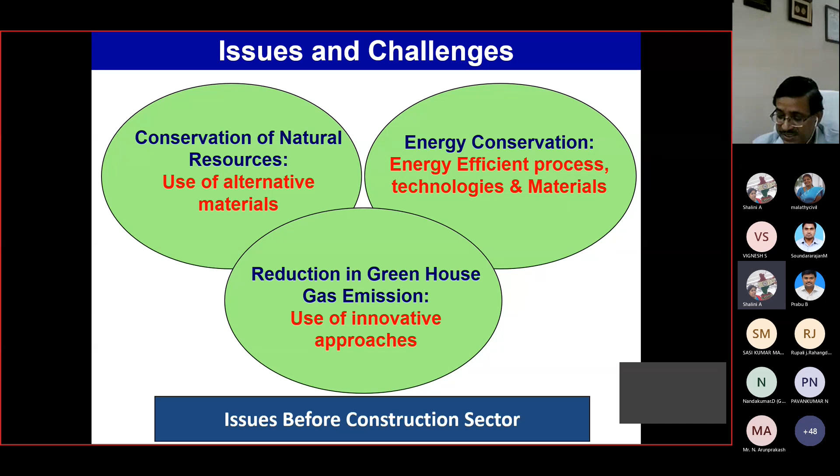Major energy is being consumed in the construction sector. If you look into energy and greenhouse gases, 35% of our energy consumption is in residential building, non-residential building and the construction industry. So it's not much in building, but the operational demand of residential buildings is very high, and we have to look for other renewable energy, and people are working on different aspects. So to get a net zero building, they are using solar power, wind power and other things, and doing green retrofitting, all those things to reduce the energy demand of our built houses and other things.

Similarly, if you look into emissions, they contribute about 38%, and building construction itself about 8 to 10%. So it's very high, and we have to reduce in those areas. So every organization and the government, Niti Aayog, climate change bodies, everybody is behind how we can reduce greenhouse gas emissions as well as global energy demand.

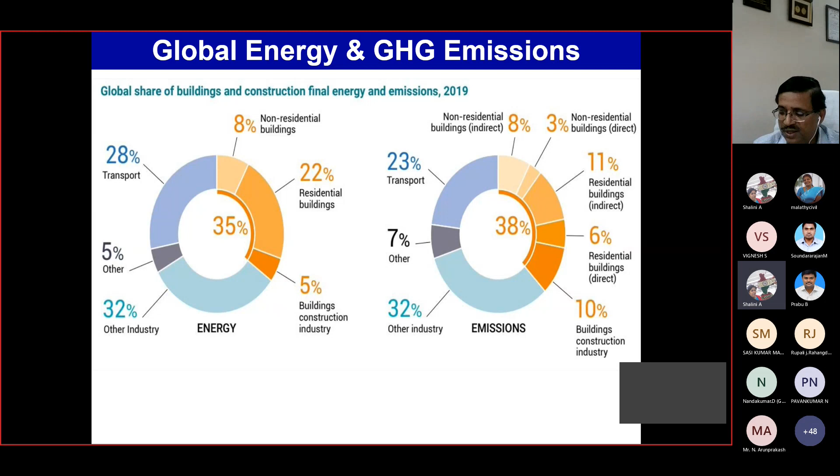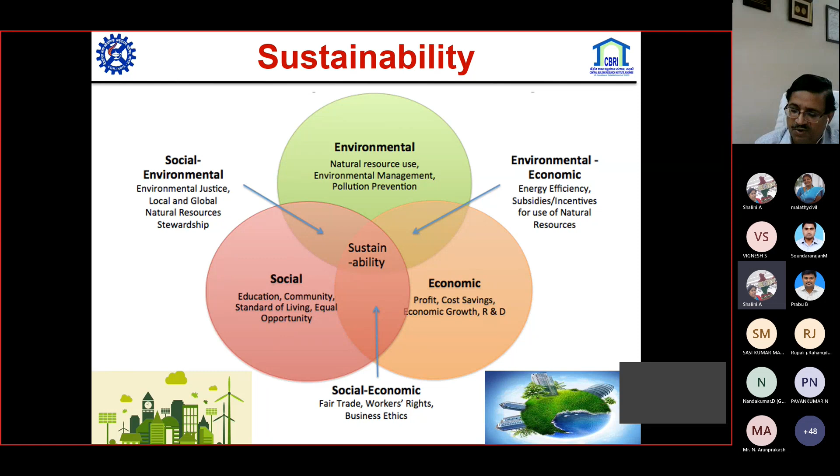And if you look into our infrastructure and the sustainable development goals, it is contributing to all 17. From goal 1 to 7, we are enhancing access to basic services, and from 11 to 15, really where our work should impact, that is promoting environmental sustainability, and 8 to 10 and 16, 17 support our inclusive growth.

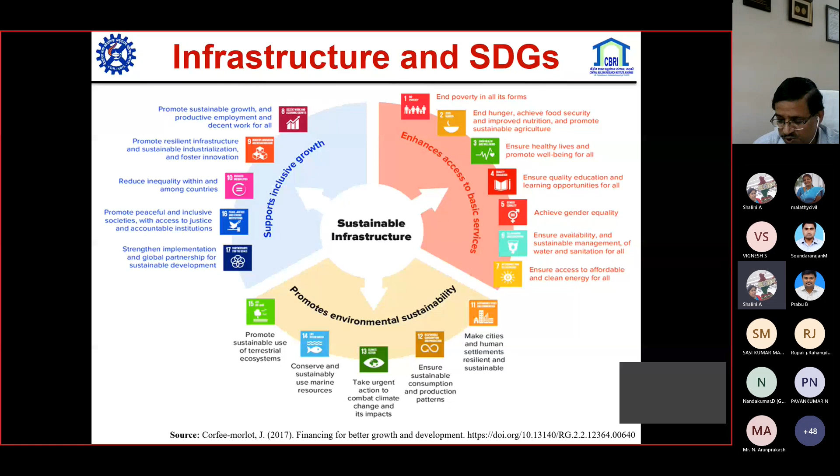But if you look very particularly towards building construction, we are meeting the requirements of good health and well-being, that is SDG goal number 3, affordable and clean energy, goal number 7, decent work and economic growth, 8, industry, innovation and infrastructure, 9, sustainable cities and communities, 11, responsible consumption and production, 12, climate action, 13, life on land, and that is important for our growth. So all our goals are here.

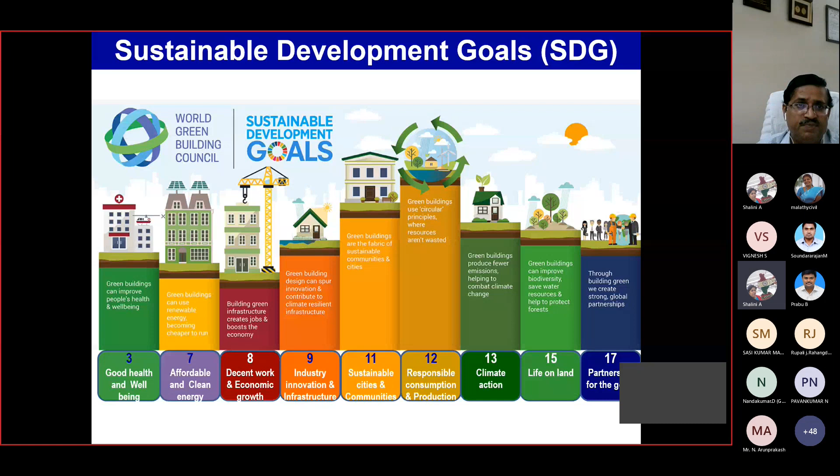To achieve all those things, if you look way back, some years back, we were taking materials. I worked in different parts; I worked as a project director in the National Highways Authority way back in 2000 to 2005. So what we did, we identified a source, some hillock, we blasted it and started getting good quality aggregates and put up our plant. So we were taking it, making our materials, using it, and throwing it. That was known as the linear approach. And until 10-15 years back, everybody was doing like this.

So if you are making a house, whatever materials we are not able to use are thrown away. That was a big problem, because it was the depletion of our natural resources. Right now we are not getting good quality sand, and everybody is looking for manufactured sand or alternative types of materials, or good quality coarse aggregate also, because our approach was towards the linear side.

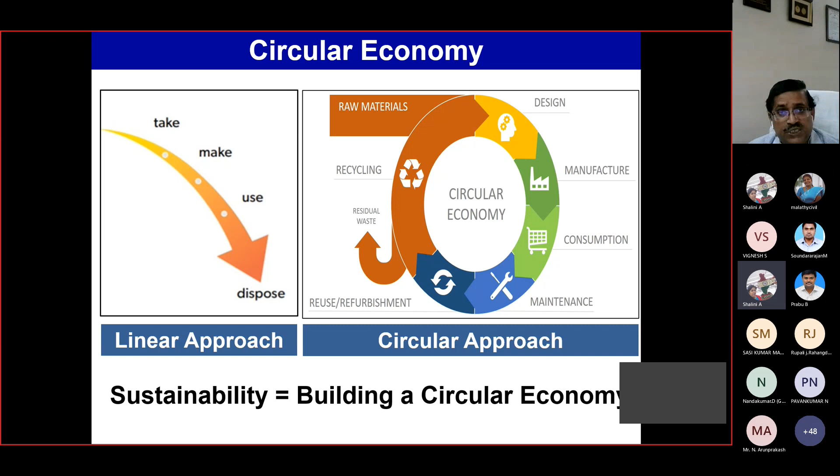And I have tried to show how, if there is some material that is not good raw material, or industrial waste, then by carbonation, or what we say carbon sequestration, we can enhance its mechanical properties and utilize it. So it can be steel slag or bio-ash or lime sludge, red mud, bottom ash, and we can utilize those materials as newer building materials and sustain that sustainability aspect. So that is the important thing.

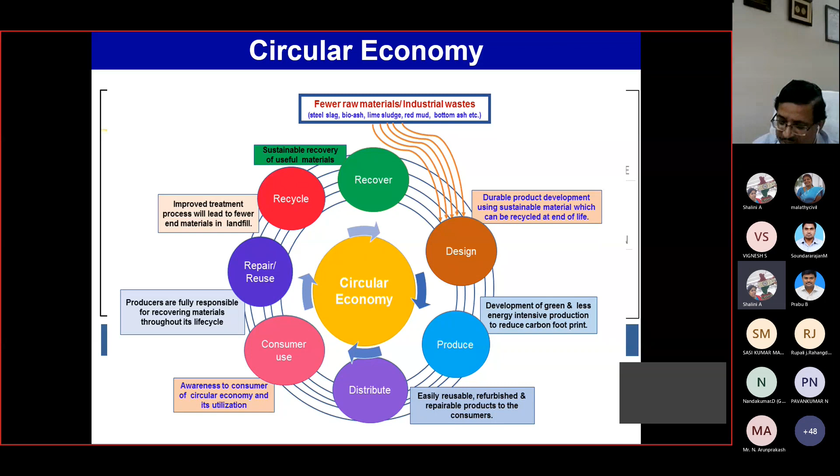So same thing, we have design, produce, distribute, use, recycle, and recover. Whatever waste is there will be thrown away, or we process it further, or we can utilize it for carbon sequestration. So this is, and I'm coming to my next slide, that is sustainable construction.

People always ask, what is sustainable construction? It is reduced resource consumption, reuse of resources, protection of nature, natural resources and material. That is the utmost important: recycling and reuse of construction and demolition waste, enhancement of service life of structures, reducing environmental impacts of cement production, greater use of supplementary cementitious material, research and use of emerging materials and technology, greater use of renewable energy, effective control and construction management systems, elimination of toxic material, applying life cycle cost analysis, and last but not the least, focusing on quality.

If you look into our buildings or infrastructures, if you have not focused on quality control during construction or at the initial stage of materials, a lot of problems occur and it could not sustain up to its life. So with that lesser life, we are using newer materials again, so that will be a big thing. So our main aim is to use emerging materials and technology in construction.

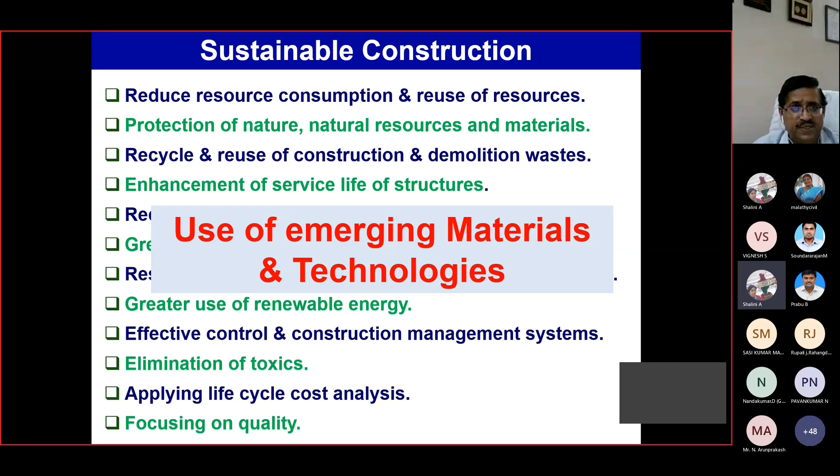So I have defined what sustainable materials are. Again, they are composed of renewable rather than non-renewable resources and should have environmental responsibility. Means they should have a minimum energy requirement during processing, minimum possible environmental cost, low energy utilization in manufacturing as well as functioning, and be easily recyclable, efficient, durable, with longevity.

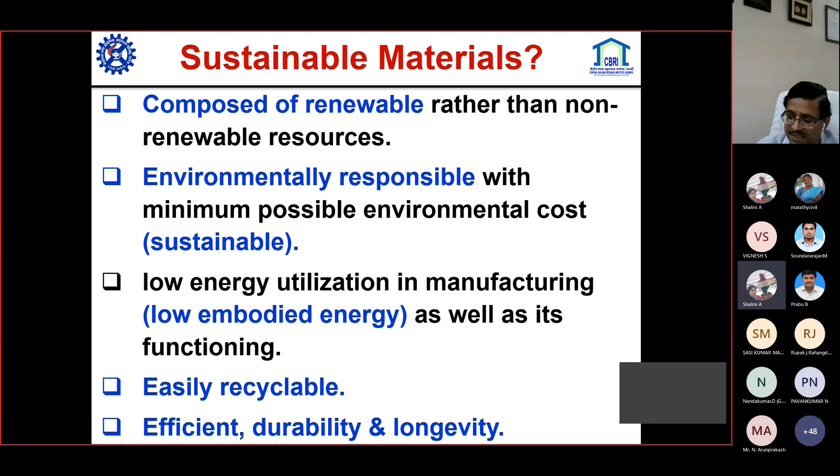As we are aware, ordinary Portland cement is one of the oldest materials. We have been using it for about 2 centuries, more than 200 years, and we are so accustomed to utilizing it that nobody can think of a material other than cement.

But definitely there are several other types of cementitious material available, and we are aware that about 1 ton of ordinary Portland cement clinker produces about 0.66 to 0.85 ton of carbon dioxide into the atmosphere. And this carbon dioxide is a major issue, and it comes from calcination of calcium carbonate or lime. So this is the process.

So people have started thinking how we can reduce this, because major CO2 emissions come from the calcining of limestone. So not only from the climate change committee or our Niti Aayog, cement manufacturing organizations are under tremendous pressure to reduce their CO2 emissions and also energy consumption during fabrication or production.

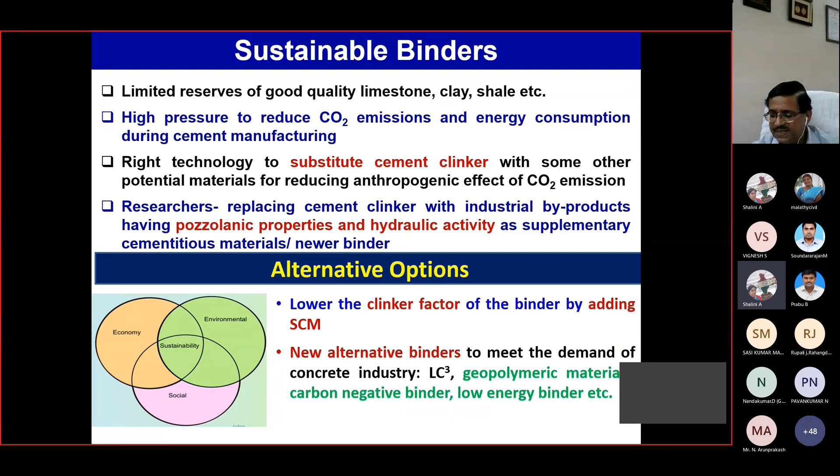And different types of low energy binders have been developed in due course of time, and people are working on that. A few binders have been tried, like calcium aluminate cement, where they added crushed limestone and bauxite, and that work is going on and they have found it's okay. They have found there is a strength loss by conversion of metastable hydrates, but overall there is no problem in functionality. Calcium sulfoaluminate cement is limestone, bauxite, and gypsum. This is a little bit expensive. It expands. Some people have reported on durability, but work is going on.

Composite cement, as I have told, has Portland clinker only up to 30 to 35%. The balance 60 to 70% is GGBS, that is ground granulated blast furnace slag, and fly ash. Its initial strength is lesser, and it requires extended curing durations. Another is composite limestone cement. Similarly, there is alkali activated binder, what I called geopolymer binder. We have worked at CBRI on two component based binders, but right now we are working on single part binders like cement, and we are improving rheology and setting time issues.

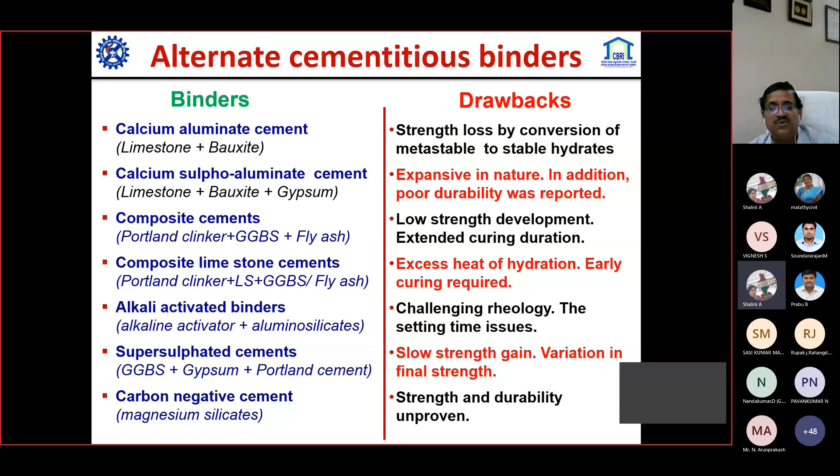Super sulfated cement, and carbon negative cement, which I have discussed, that is magnesium silicate. In due course of its use, it takes up a lot of carbon dioxide, gaining strength and durability. Still, fewer things are known. I have mentioned limestone calcined clay cement. I have told that we have not thought beyond our ordinary Portland cement, because we have been working with it for the last 2 centuries. We know each and every property of it.

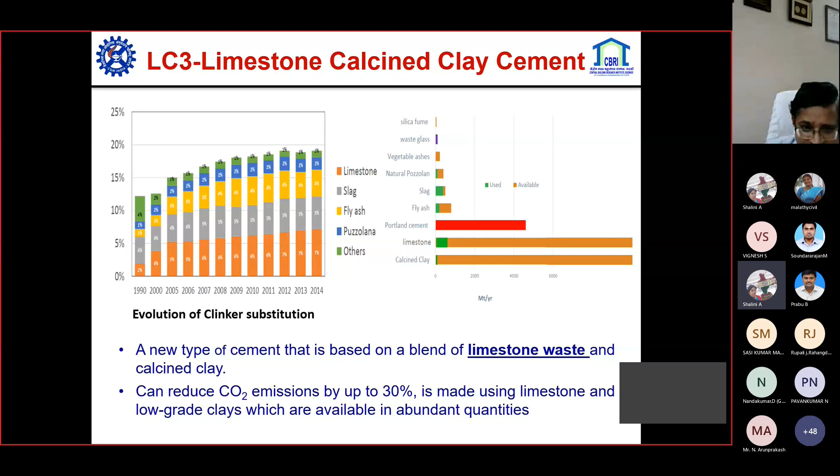But in this we have blended not good quality limestone, the second type of limestone waste, and calcined clay. Clay is calcined at a lesser temperature, about 600 to 800 degrees centigrade, and overall CO2 reduction is about 30%. In India we have abundant low grade clay and this limestone, so we can utilize them and produce a good quality material. A few manufacturers have come up making this, and one day you'll find people start using it, because there is so much pressure on reducing our energy demand as well as CO2 emissions.

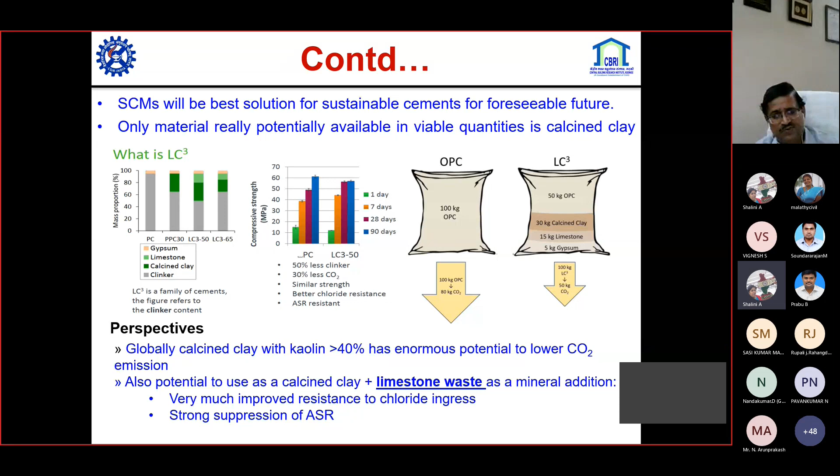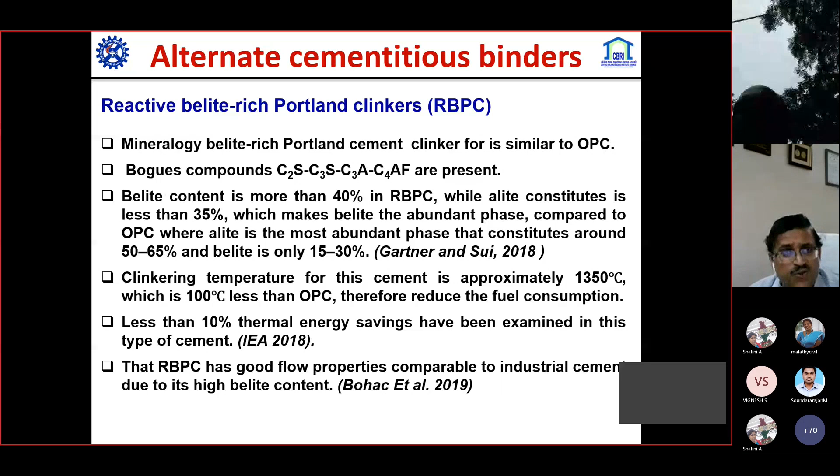Another is belite rich Portland clinker. It was invented in China, and several other countries have started looking into it. Mineralogically, it's similar to ordinary Portland cement but a little bit different, because the belite content is higher, and by this our energy demand is reduced: the clinkering temperature goes from a maximum of 1450 degrees centigrade to only 1300 to 1350 degrees centigrade, and overall energy saving is less than 10%. Its properties are good, and a lot of high belite cement is being used all over China, where a few manufacturers are producing and utilizing it.

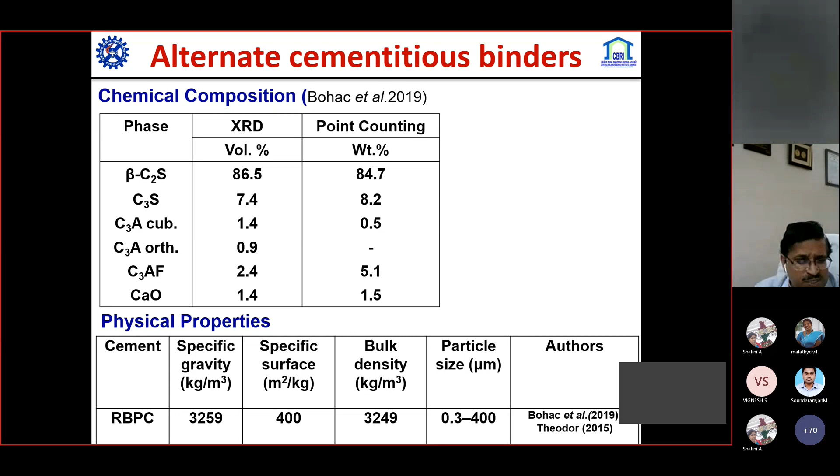If you look into this beta C2S, the belites have a high quantity as compared to other C3S or alpha C2S and other things. The specific gravity is about the same, little bit higher than this one, and other properties will be the same.

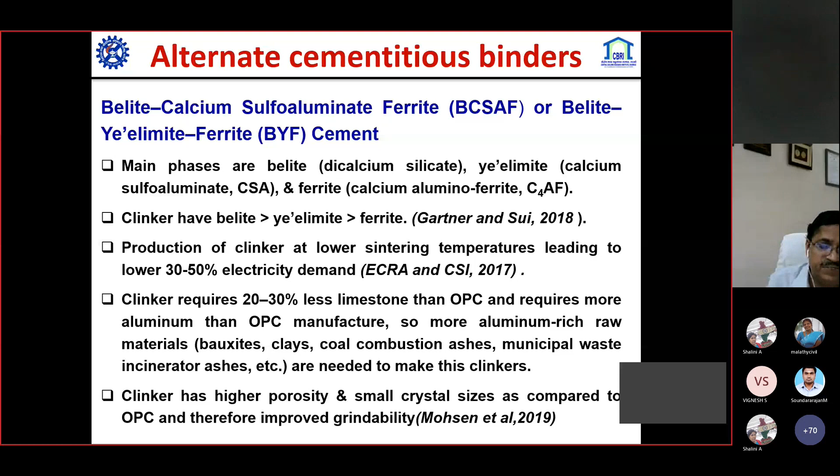So another type is Belite calcium sulfoaluminate ferrite cement. Here, clinker requirement gets reduced up to 30% as required in OPC, and by this we can reduce both energy as well as CO2 emissions, because this will be lesser.

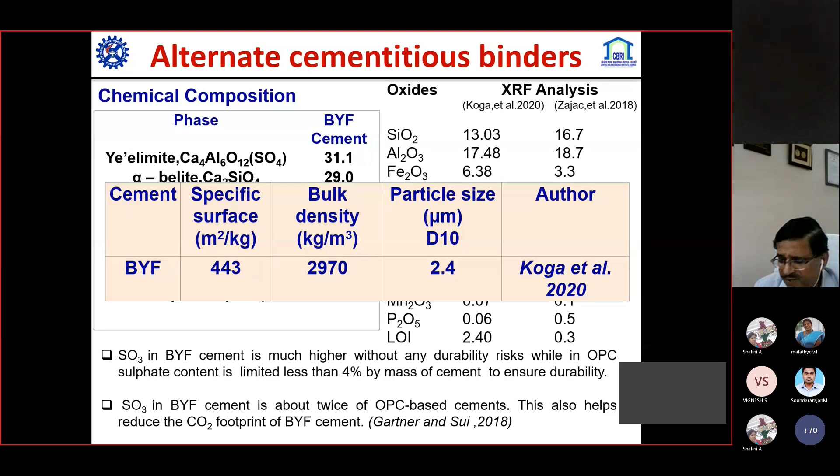So I am quickly showing the properties of this cement: specific surface is about 443 meters square per kg, density is 2.97, specific gravity is 2.97, particle size D10 is 2.4, and different researchers have worked on this and found these values.

Recently I was looking into sustainability, and MIT calculated that a simple concrete, whatever carbon dioxide it produces during its construction, about 50% of that is absorbed back due to the availability of calcium hydroxide and other things, and it gets converted into carbonate.

So it means concrete also absorbs some carbon dioxide from the atmosphere. So that is the important thing.

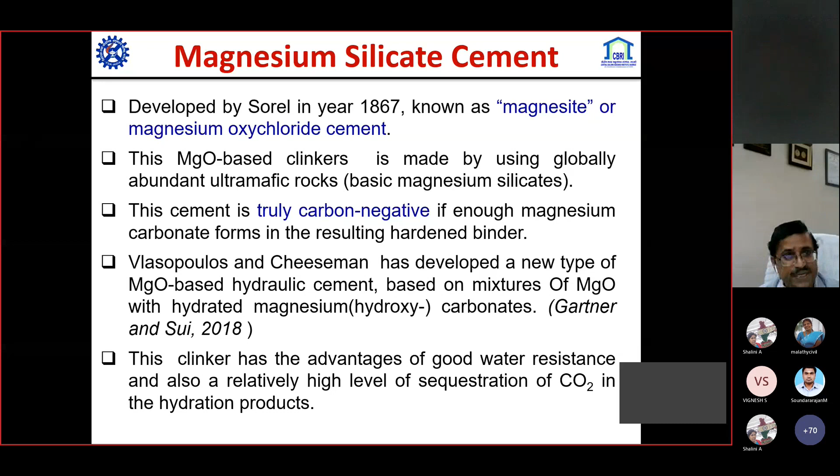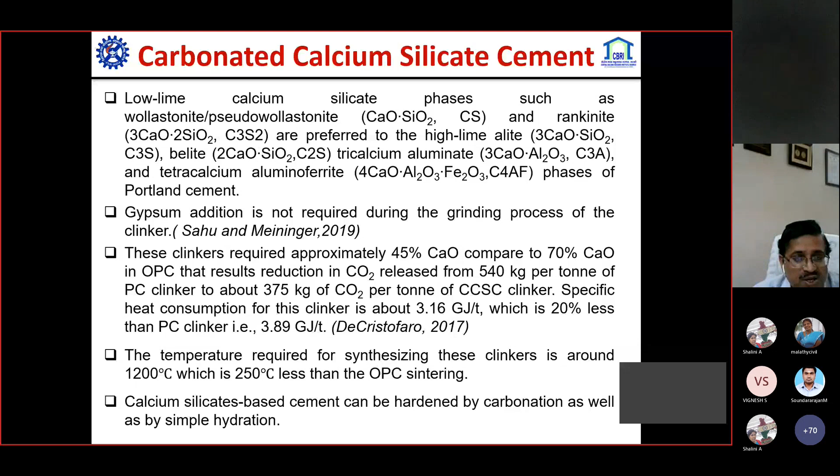It means overall we should have sustainability aspects and look for other types of cementitious binders in the country; our approach should be like that. I'm not going into this one, but definitely...

Geopolymer binder is going to have another breakthrough. People are working on it, and we are also working at CBRI on single component systems, because it's a handling issue. If we are able to have a proper single-based system, we have tried it at laboratory level, but at a demonstrative level, it definitely requires a lot of time and energy.

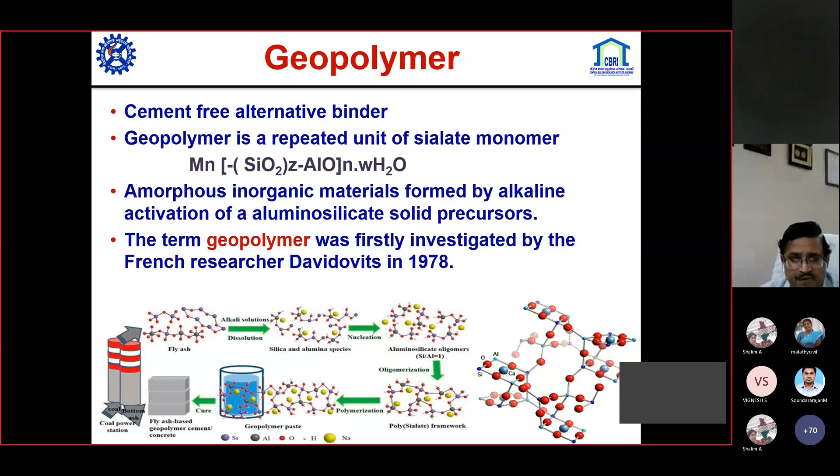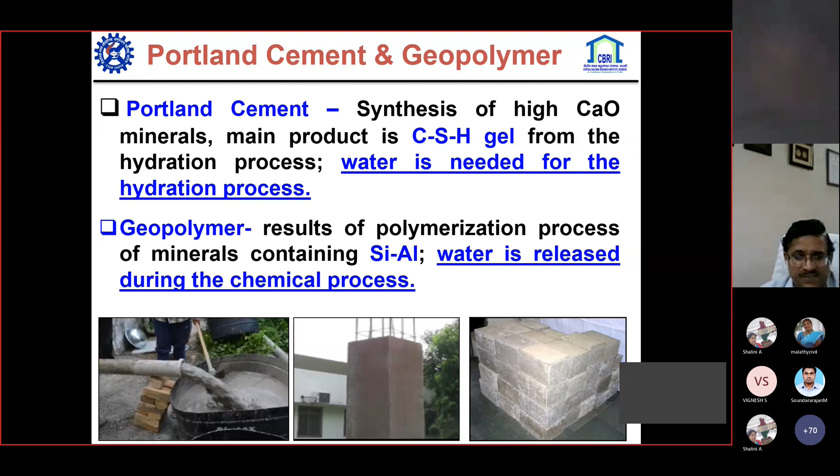So if we can develop this in a bag form or a single part form, it will change a lot of things, and we can achieve very good binding materials with about 80% reduction in CO2 emissions. A lot of its uses has been done on a two-part basis, but we are working on a single part basis, continuously modifying our things.

So that part, where I have discussed newer types of cementitious or other binders, has an overall impact on reduction in energy requirement as well as CO2 emissions. So that was the basic thing.

Next, if you look into the aggregate part worldwide, about 50 billion tons of aggregate is required by the world, and we are not getting good quality aggregates. If you look into coarse aggregate as well as fine aggregate, there is a big scarcity of fine aggregates.

50 billion tons is a huge quantity, and it is being used in the road sector, whether it's asphalt or concrete, buildings, all infrastructure everywhere, as WMM or whatever we say. So that is the biggest issue, and we have to look into how these demands can be met, and not only meeting the demand, but also minimizing our disposal issues.

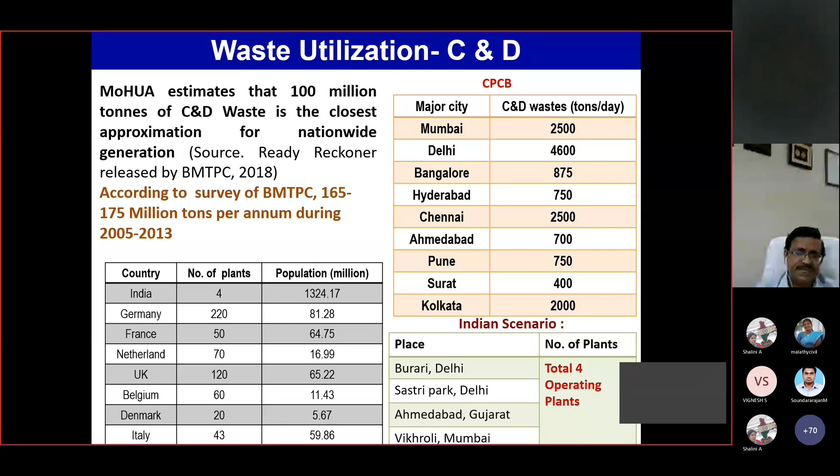They should recycle all construction and demolition waste and convert it into aggregates or different types of building or construction products. Overall, in India we are much more lacking toward that.

I tried to take some photographs, and if we can understand the problems with this type of aggregate, we can modify it through processing and removing unuseful materials, separating them out so we can use it as a similar material.

This is the requirement, the need of the hour, and different types of products people are utilizing right now as fine aggregate as well as recycled coarse aggregate.

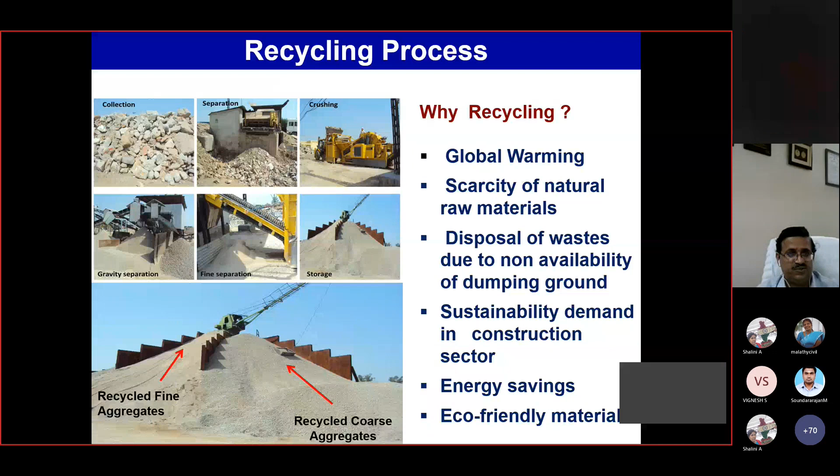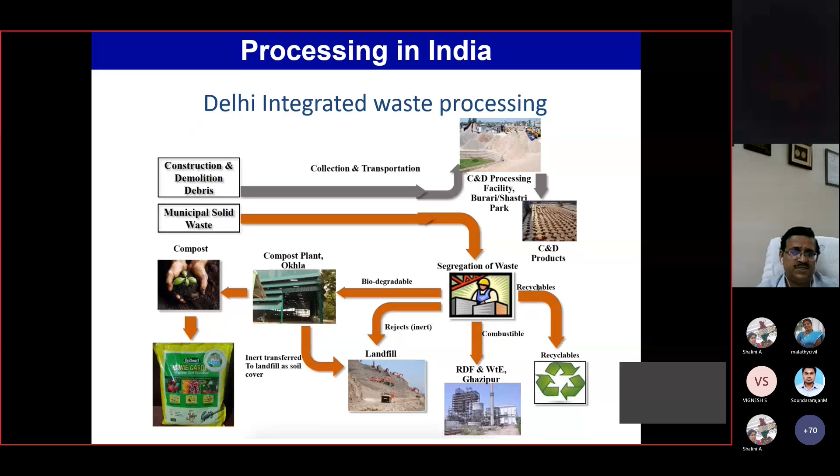If you look at recycled concrete aggregates, they are used only from demolished concrete material. If it includes bricks and other things, it's known as recycled aggregate or recycled fine aggregate. A lot of products are made at the site itself, like building blocks and paving blocks, and people are using concrete for housing or infrastructural project requirements.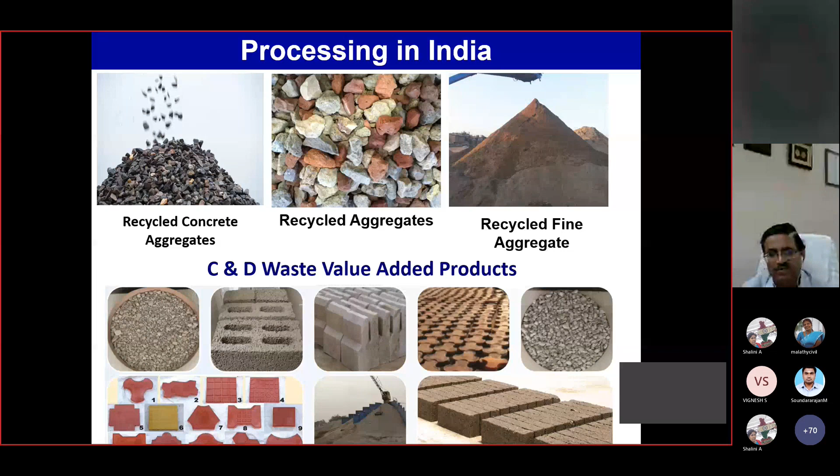They have a small plant with a capacity of 35 cubic meters per hour of concrete production. That is the important part.

What I said is that you have to understand the problem, why people are not using this recycled concrete aggregate. This is the problem that exists. If you take the same analysis of your recycled concrete aggregate...

This is actually the aggregate that was used at that time, from where the demolition was achieved, and this is old cement paste. If you look into it, this adhered mortar or adhered cement paste is honeycombed, not very strong.

This cement paste is the weakest zone, and if we can improve this cement or adhered mortar zone—by removing it through grinding or by carbonation methods—we can achieve a good aggregate from this recycled concrete. That was our major concern to look into.

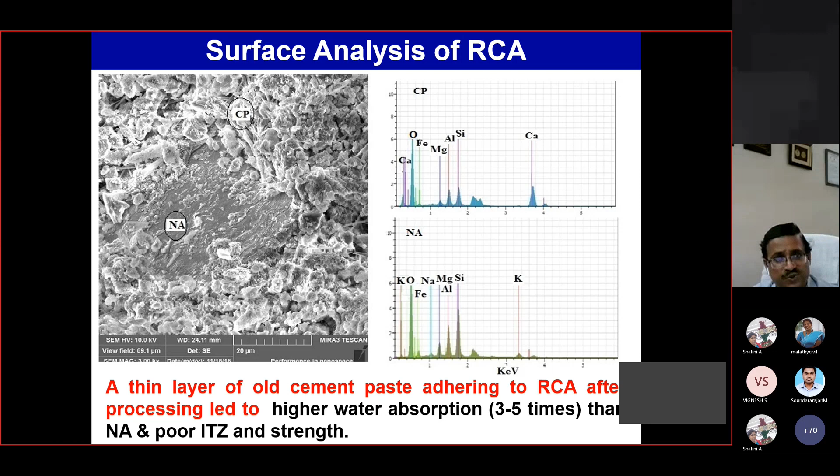This is why, if you look into it, the adhered mortar is loose. Similarly, if you look into the fine aggregates, they all have some elongated part as recycled fine aggregate. Besides those materials, there is silica.

If you look into that, rivers have high silica content, and here there is calcium carbonate content. But in this, you have to get some calcium silicate hydrates and other cementitious binding properties.

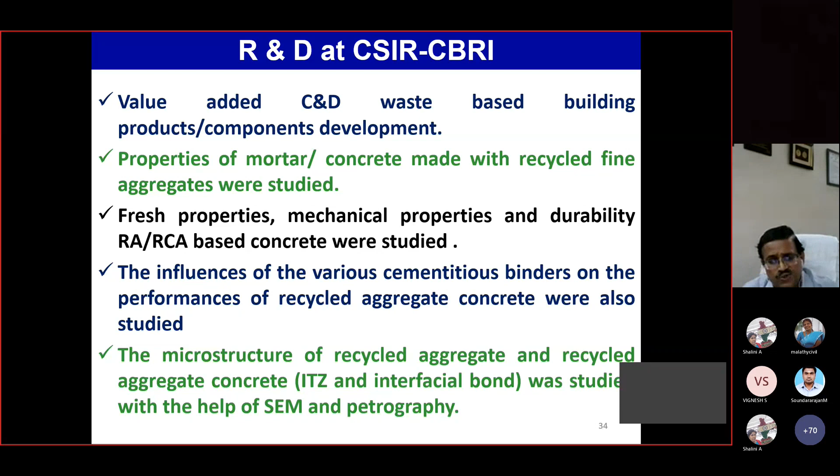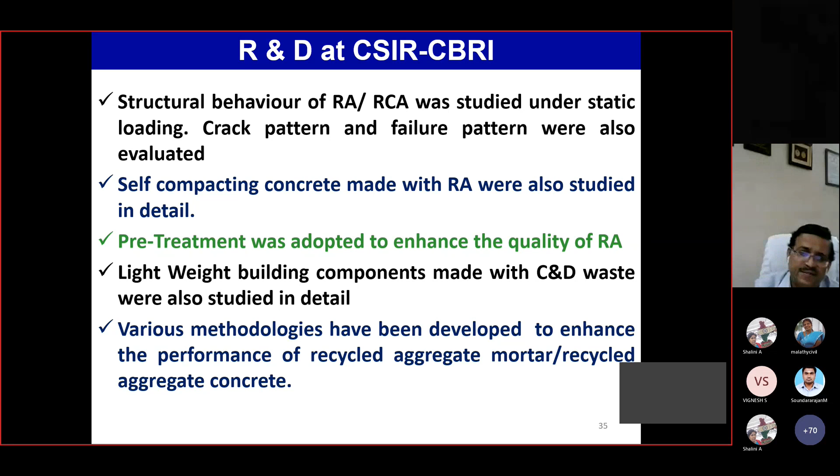So not only have we characterized different types of C&D waste, we also had to figure out how we can improve their properties mechanically, and chemically through the interfacial zone, to achieve good strength. We have also done different mixing processes, increasing the mixing time and adding cement or finer parts into the mix.

I am not going much into those details, but definitely those things are there. So utilization of recycled coarse aggregate and fine aggregate is the utmost important thing.

With that mindset, right now we are revising IS 383:2016 again to include more and more other types of aggregates. One of them is steel slag.

People get a little confused with iron slag. Iron slag is basically what we know as blast furnace slag, based on the furnaces used. So that was iron slag.

Blast furnace slag has a very high level of amorphous material, and the majority is used in the production of cement. Why isn't it used as aggregate? Because these slags have free lime, and after processing to remove that free lime, it can be utilized as fine aggregate as well.

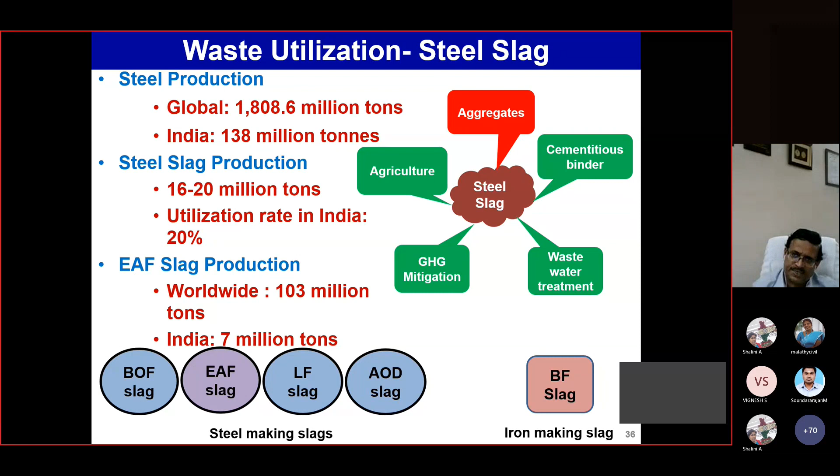So about 90% or more than 90% of BF slag is being utilized into cement production. So that was not a big issue, but the balance here, this is the steel slag. So we worked on both areas to utilize it as a coarse aggregate and as a cementitious binder.

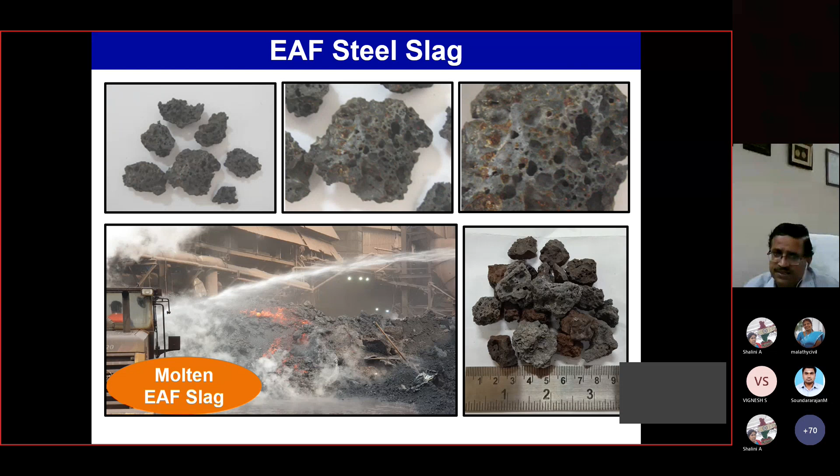We worked on this electric arc furnace slag process, and we have utilized it into different making of concrete, rather we have demonstrated it as tetrapods and road constructions and other activities. As I told, the specific gravity is very high, and water absorption is 1.39, along with bulk density.

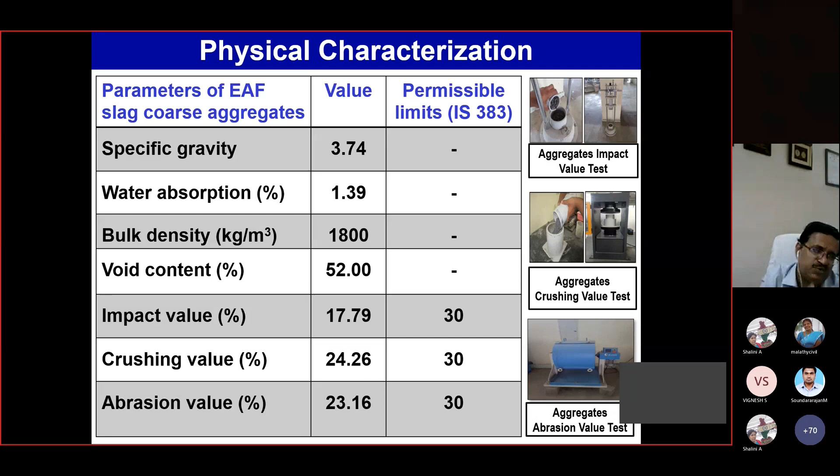And if you look into the impact value, crushing value, and abrasion value, it's very strong, better than normal aggregate. It is mainly made of calcium oxide, and has a high level of Fe2O3, varying from 18% to 30%. They process it during the slag, and if it is more than 30%, it can be used again into the production of steel.

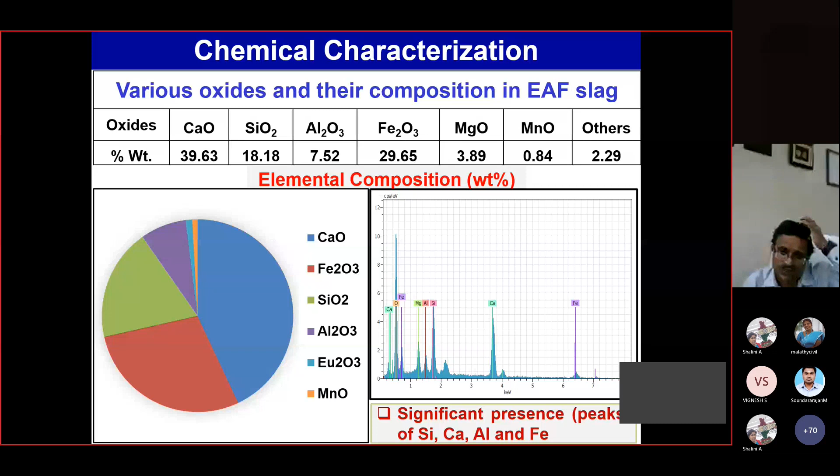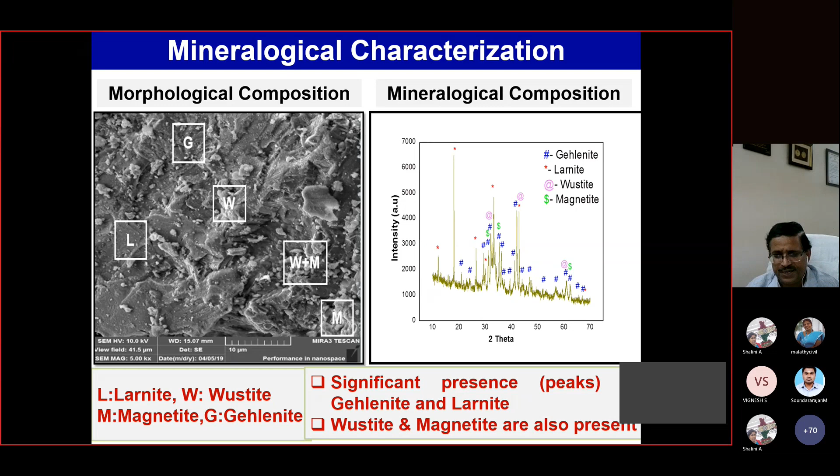If you look into the mineralogical or morphological compositions, they have larnite or wustite or magnetite, all of which are cementitious material properties, but in crystalline form. Because crystallinity is very high, it can't be utilized as a cementitious binder, but due to very high hardness, it can be used as coarse aggregate as well as fine aggregate.

We worked on both coarse aggregate and fine aggregate, looking into different processing and other material properties. We found free lime at 0.89, but if kept in the open, it will be reduced about 70%. We've done different processing of this aggregate by carbonation, steam curing, open natural weathering, and microwave weathering. All those methods showed reductions, and we found that within 3 months it will reduce.

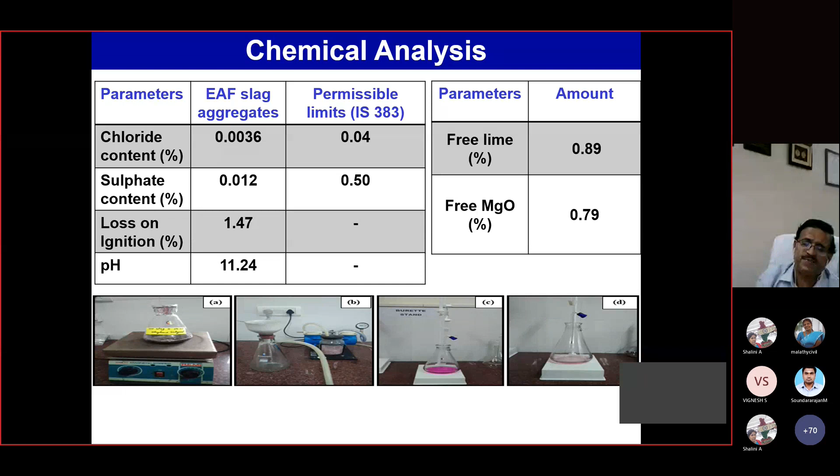And free lime, if utilized into concrete, by masking effect, is not going to have much effect on the concrete properties, meaning whatever expansive behavior occurs gets masked within the cementitious compound. So that was the issue here.

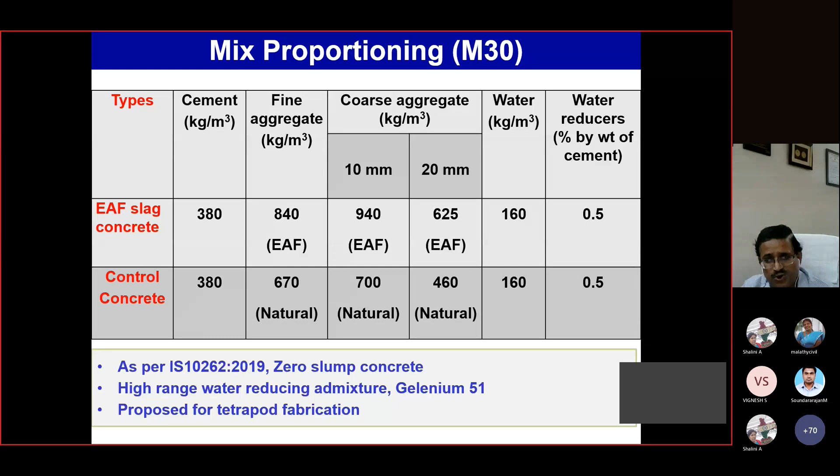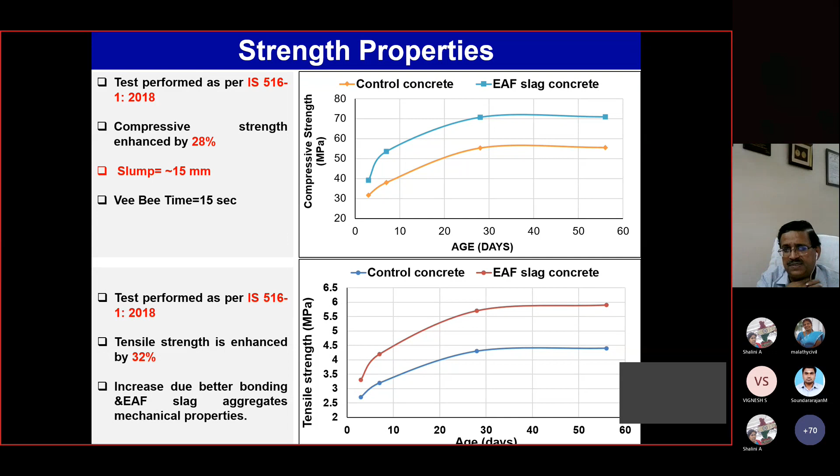We compared electric arc furnace slag concrete with control concrete. Strength was very high in the electric arc furnace concrete, because of its rougher surface bonding with cement paste, and the same way tensile strength, flexural strength, and modulus of elasticity were all much higher. Only thing is its density is about 2800 to 3200, so it will be very good for making tetrapods, or where weight is an important factor.

We have also worked, as part of our activities, to reduce that free lime through CO2 mineralization. And not only have we done this in a laboratory, we have done it at other sites also. I am just giving you a glimpse of that, how we are capturing CO2 on-site from permanent emissions, and these are the different methods.

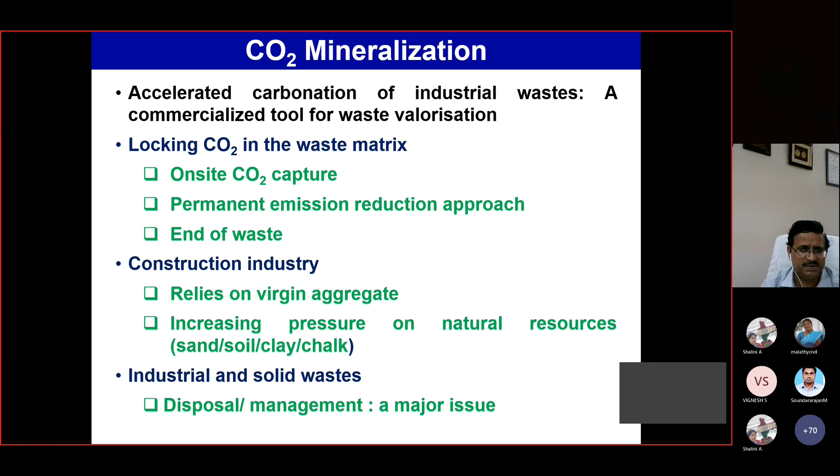This is a different type of carbonated biomass. I mentioned that municipal waste is generating a lot of different material. Then we try to make it and carbonate it with CO2 mineralization. So nowadays, everybody is saying how we have to capture the carbon dioxide from the cement industry or any type of industry, steel industry, and utilize it.

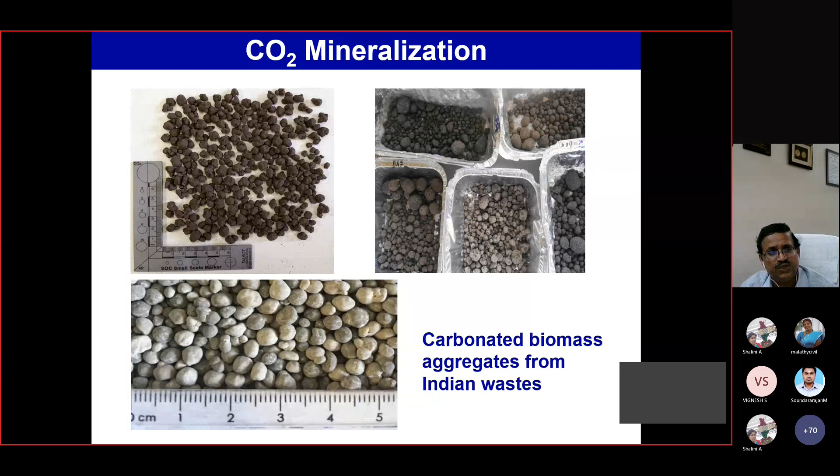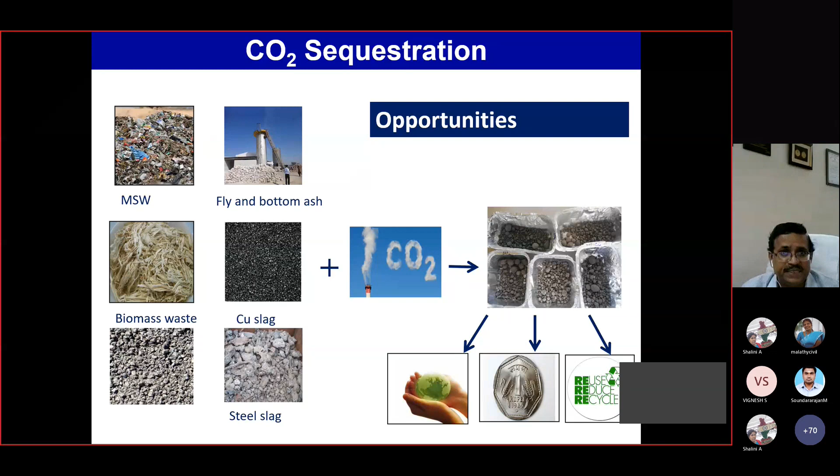So we have those things we can do at the laboratory level, and by this, not only steel slag but everything, adding CO2 under pressure, we can get different types of coarse aggregate and other things. By this we have enhanced our properties, enhanced our money and value for money. That is the important thing. I'm not taking much on this, only one or two slides I would like to show.

We have looked and worked on different types of alternative fine aggregates at CBRI, and we have developed and published a methodology for that, looking into crushed rocks and recycled fine aggregate, coal bottom ash, and steel slag, that is called LD slag fine aggregate. And we have done extensive studies showing how we can use all those things.

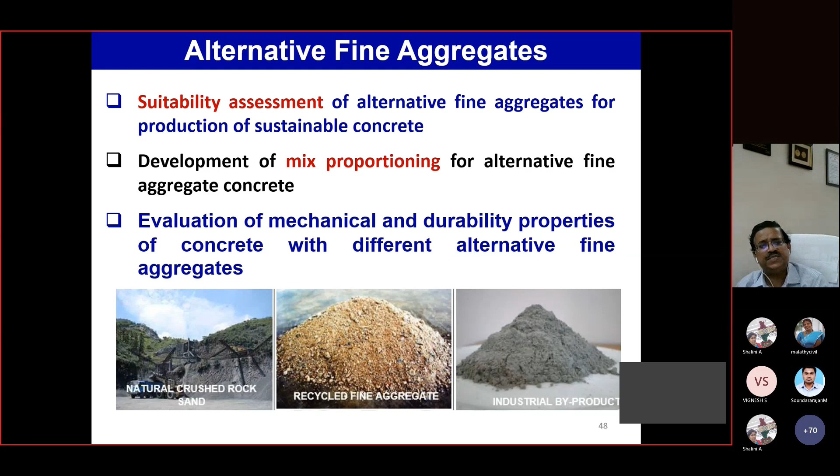And if you look into coal bottom ash, if you replace your natural fine aggregate by 30%, there is no problem, no loss in any strength or other property. The same thing happened with the recycled fine aggregate. You can go up to 30% replacement of the natural aggregate. So that shows how much has been done.

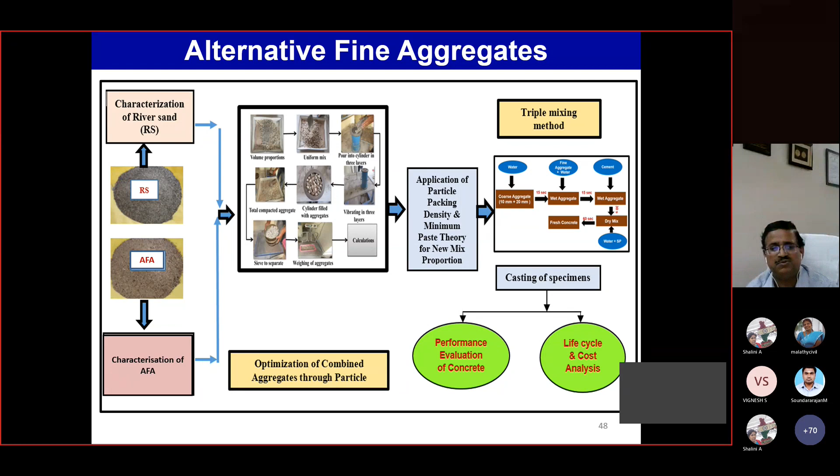And we have also optimized that, and we have developed a minimum paste and maximum density mix proportioning system, so that we can do better. With this we can minimize our cement consumption as well. So if you do M30 grade, it requires about 380 kg or 375 kg of cement. If you do it with minimum paste and maximum density, it needs only about 330 to 340 kg. So you have a saving in cement.

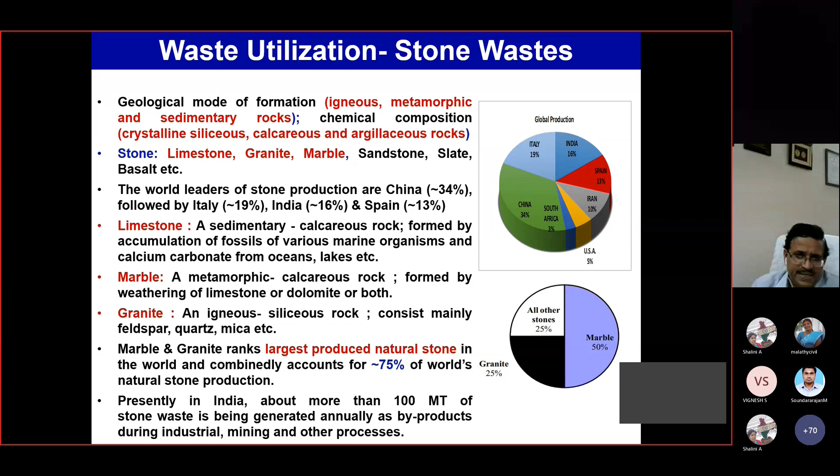We have worked in other areas as well, that is stone waste, like Kota stone, marble dust, and other lime tailings, so I will quickly go through those areas. Limestone is all nearby in Rajasthan. Initially marble dust was abundant, but ceramic industries, the tile making industry, are taking huge quantities from Rajasthan to Gujarat. So that has been minimized, and so we worked on that.

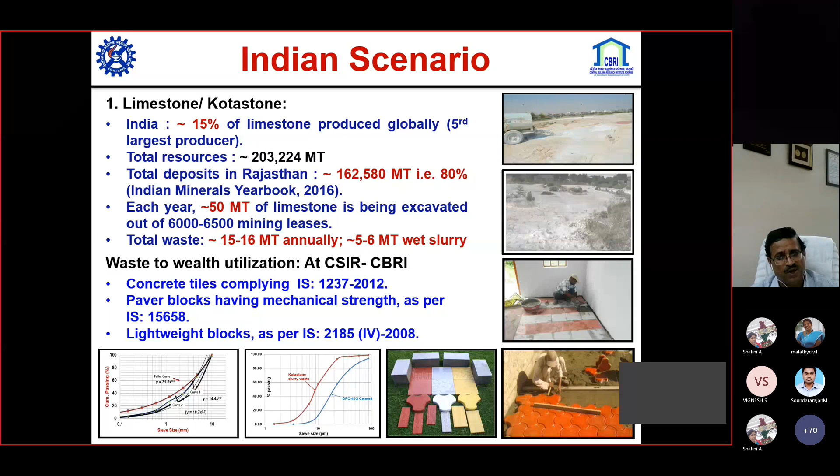We carefully created mix proportioning, and knowing those properties, we have developed different technologies, and that has been transferred to nearby industries, and their small industries are making lightweight blocks. And where it is finer, we are making autoclaved aerated blocks also with these materials. So that has been done. These are the properties that have been achieved.

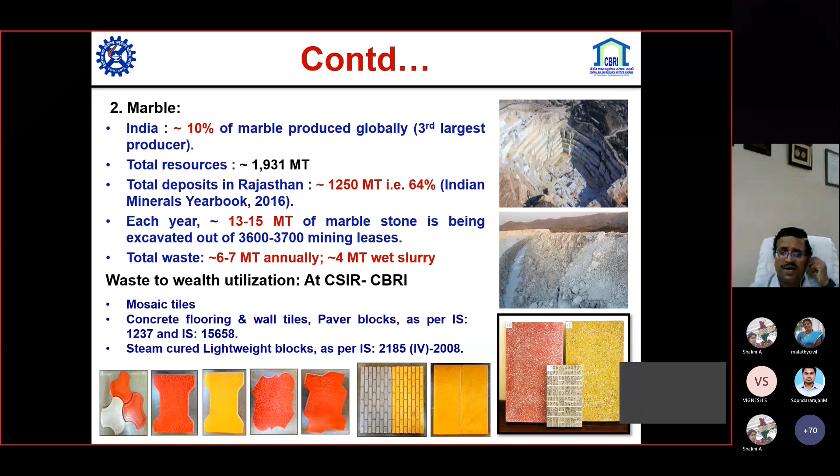I'm not taking much on that. Different types of tiles have been made, developed at CBRI, and they are making them much better than us. So that is the important thing.

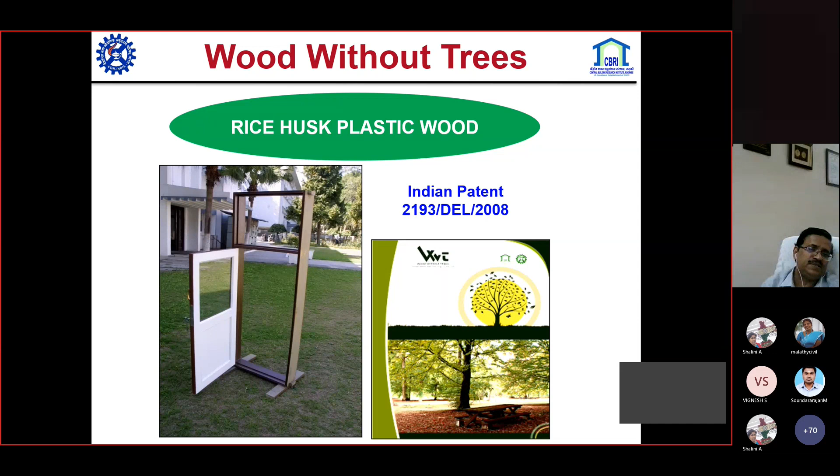I have also been heading another group that is called the polymer, plastics and composite group. So we do a lot of work on plastic utilization and materials. We have developed and patented a technology that was transferred to one agency. They are producing wood without trees. We have taken rice husk and virgin polypropylene, PP, then added and extruded them. These are the rice husks.

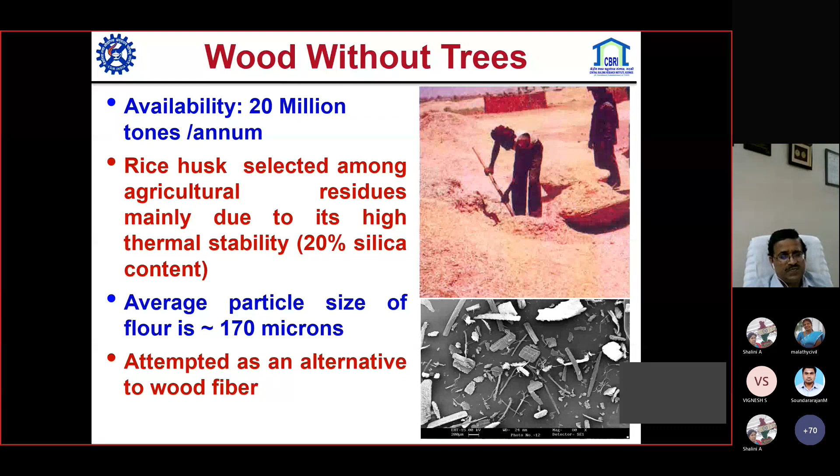In India, it is more than 20 million tons per annum, and a lot of rice husk has been used for energy production, for firing. It has very high thermal stability, and the average particle size is about 170 micron, and these are the different types.

We make granules, and from the granules we make different types of pellets, profiles and sheets. These are being produced in our laboratory, and then they are making decking material, profiles, benches and other things. All those things have been carried out effectively and efficiently.

And if anybody is visiting CBRI, the whole technology is available. They can look, and two more industries are interested, but they want another material in place of PP. So we are working on that.

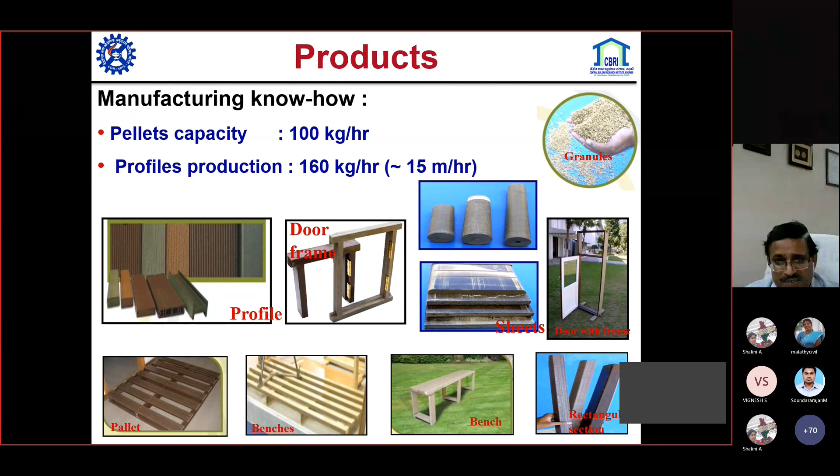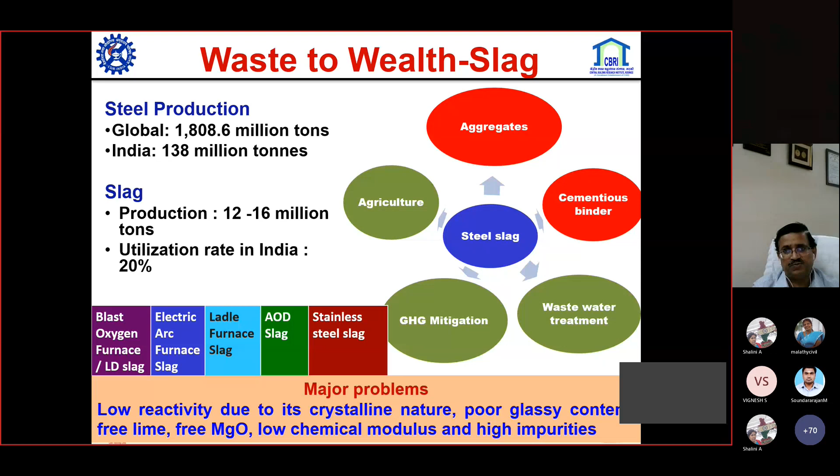I have told that we have worked on using steel slag as a cementitious binder. These are the different types, LD slag, EAF slag, and those. I'm not taking much, but our main aim is steel slag washing, then thermal treatment, mechanical sizing, activation, and then we have converted the steel slag.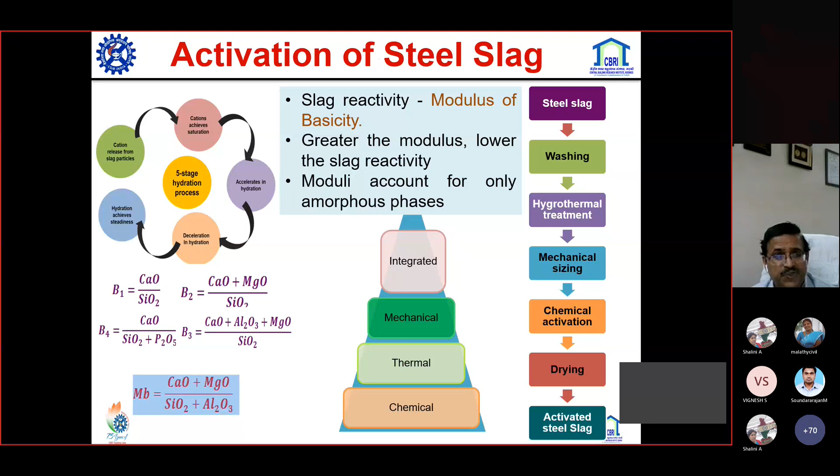That has published our paper, so you can see my name. So those are the few. Another aspect, if you look into that, is lime sludge.

This lime sludge is generated from paper industries and other places, because they use a lot of sodium hydroxide for removing lignin, and they have to recover that sodium hydroxide, and they use lime in the recovery plant. But in India there are agro-based paper industries, and a lot of silica content gets consumed in this lime.

So if they again recover that lime sludge to calcium oxide, it's very cumbersome, and the energy consumption of the lime kiln is increased, but lime is very cheaply available. So what they do, they take it out and throw it away as lime sludge. We characterized that lime sludge.

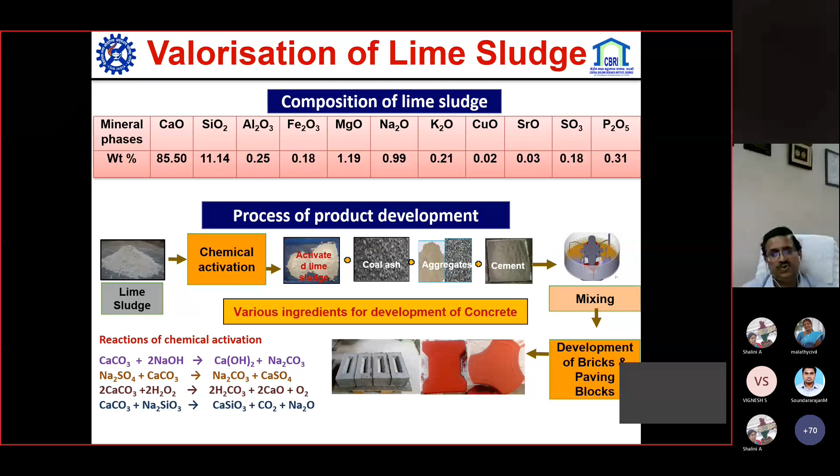We have chemically activated it and added the coal ash that is produced from their paper industries, and adding 10% to 12.5% cement, we are making bricks and blocks. And recently we have converted that technology and demonstrated it. Recently we have also worked on treating this lime sludge at low cost to make white putty. So that is another area.

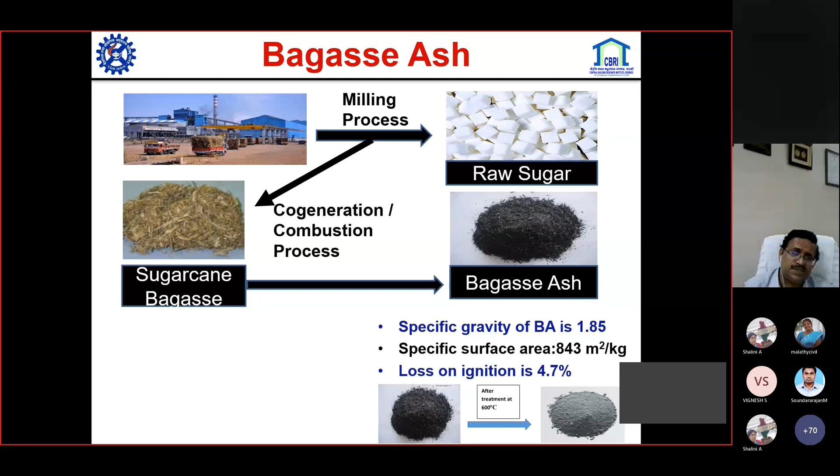Another is bagasse. I'm not taking much time, so that we can have some time for questions and discussion. We have worked on bagasse also. It is a very good material, and we have found that.

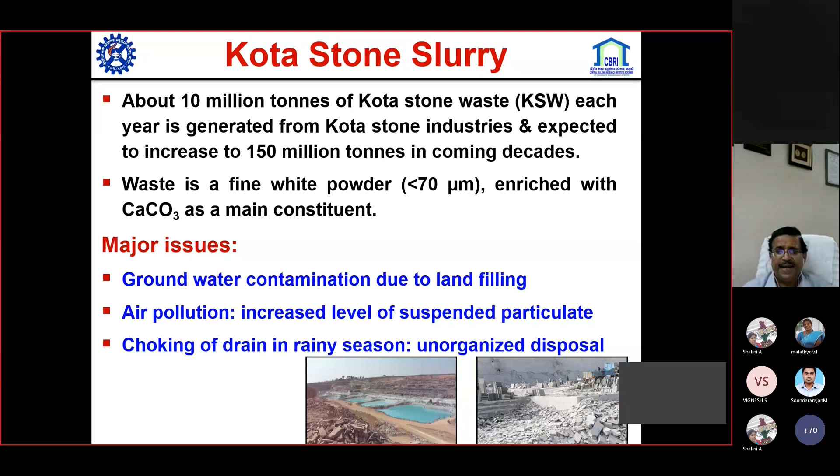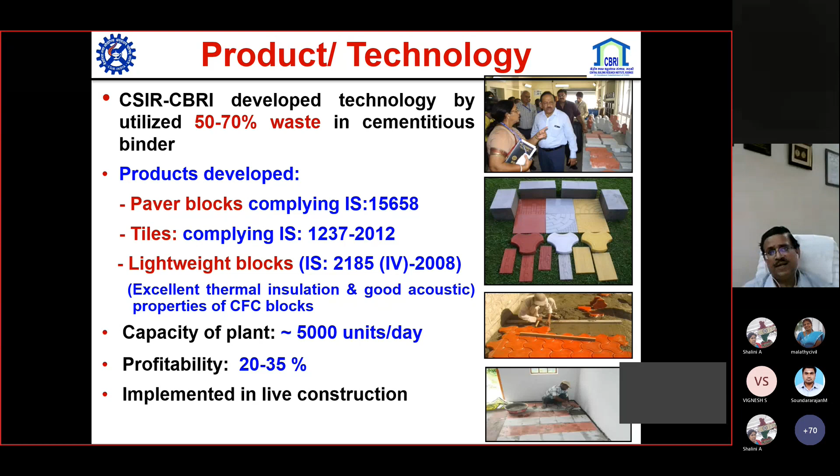Same thing, as I have said, kota stone slurry, which is a powder less than 70 micron, and we worked on making autoclaved aerated blocks. These technologies have been transferred to 3-4 industries in different parts of the country. So these are the costs. I'm not taking much on that, but we have demonstrated, and the Rajasthan State Board has been involved.

I'm going to summarize with this: you have to utilize newer types of material and emerging technologies to look forward to sustainable construction. And as I have said, we are continuously working on how we can modify our codes and guidelines.

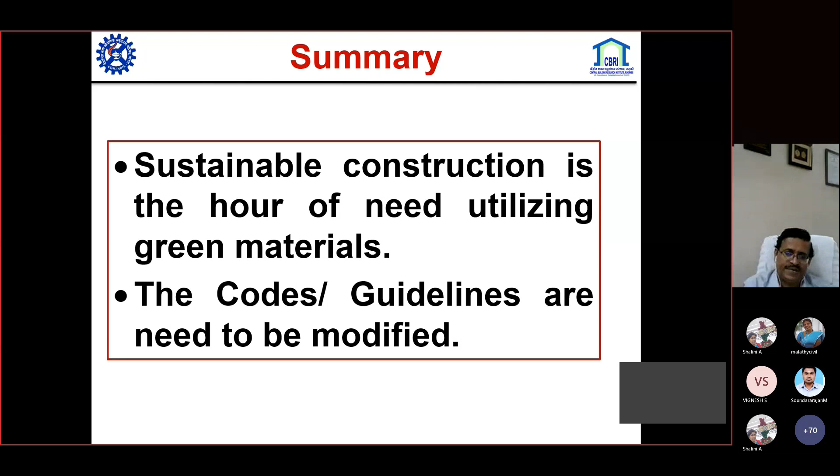And I will not forget to end my presentation with this quote of Oliver: 100 years after we are gone and forgotten, those who never heard of us will be living with the results of our actions. So thank you very much.